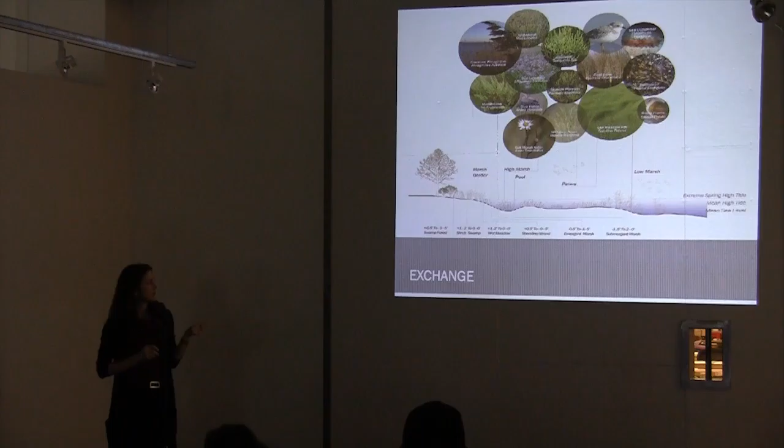But we can also think of exchange in a different way, more ecologically. These edges used to be broader shorelines that had tremendous biodiversity, and they provided a very important function of buffering the upland zones from the extremes of high tides or storm surges.

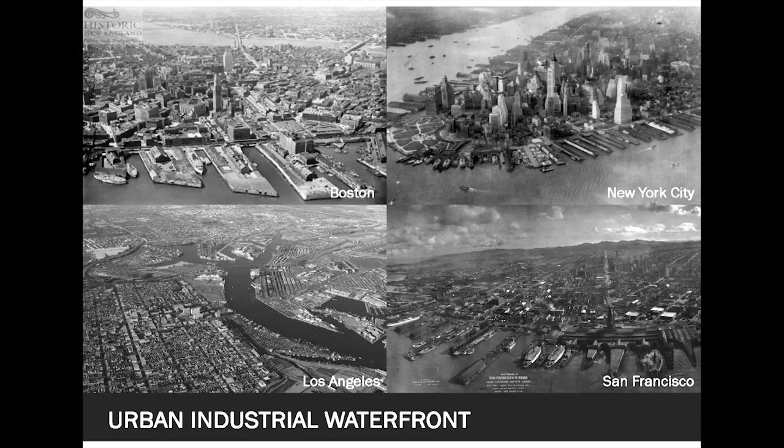But this is really the reality of our urban condition. We have this urban industrial waterfront, and many of these are now post-industrial urban waterfronts, where a lot of this space is becoming vacant. In part that's happening because of the advent of container shipping. No longer do you have people taking individual crates of goods off of boats, but instead you have these large containers which have different requirements.

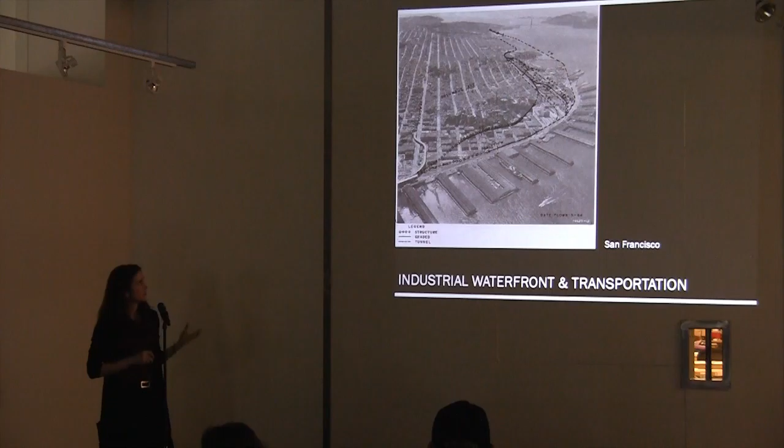They need large areas of storage, and you need the big cranes that are going to take these elements off of the boats. So what that means is that a lot of this waterfront space is actually opened up for new uses, with the industrial waterfront and transportation systems shifting.

We need to go back to that level of thinking. His work is generally cast in relationship to the picturesque, but if we think about its productive capacity, I think we can get beyond that and create new modern structures that have greater efficiency for our cities.

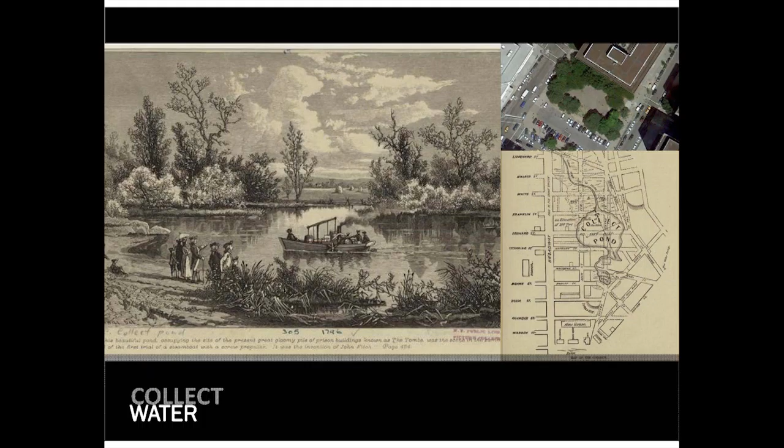We can't forget that we have this whole system of natural water bodies that exist in many cases below the urban infrastructure. This is the Collect Pond in Lower Manhattan. It's currently underneath a parking lot, and the Parks Department is actually in the process of turning it into a new park.

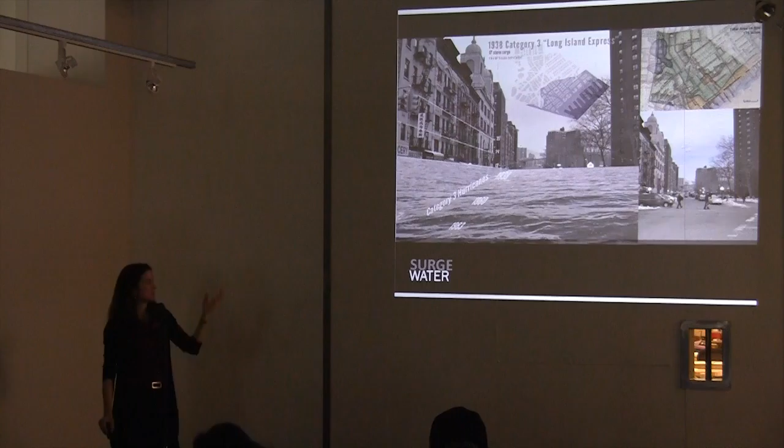A lot of these areas, if we don't actually think about how we're managing the water, we can be hit with large impacts. This is the water level from the 1938 hurricane that hit the whole East Coast. You can see on the upper right, that's the Collect Pond in blue. There is this whole water system that existed historically that has been sublimated to all of this parking. If we don't think about how this water can come in and out, we're going to end up with a fairly disastrous situation. Even without global warming or climate change projections, it's been almost 100 years, and this is a 100-year storm.

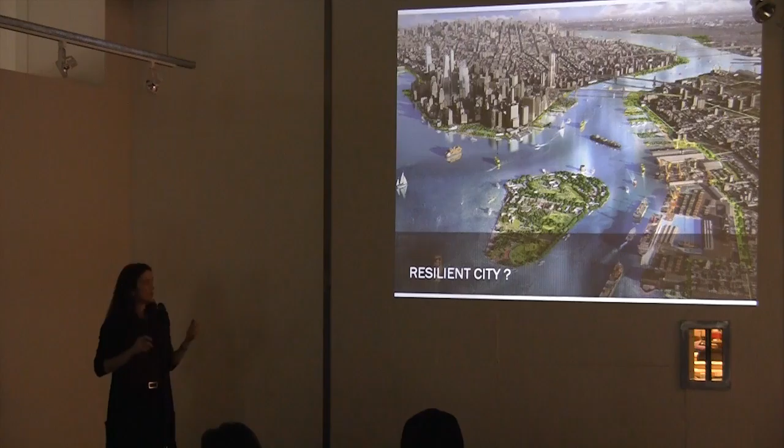This is an image that my office created as part of a task force for the City of New York, looking at how to make our waterfronts more resilient. I'm very happy to say the City of New York has been doing a lot to add these ecological layers, but also to think about how we can maintain our industrial waterfront in certain areas, establish special maritime industrial districts, maintain our tugboat traffic, and enhance ferry traffic. We don't want a uniform green edge where everything is green. We want a coexistence of all these different systems.

So I'm going to talk specifically about a few sites in New York City, as well as one project that we did as a competition up in Montreal.

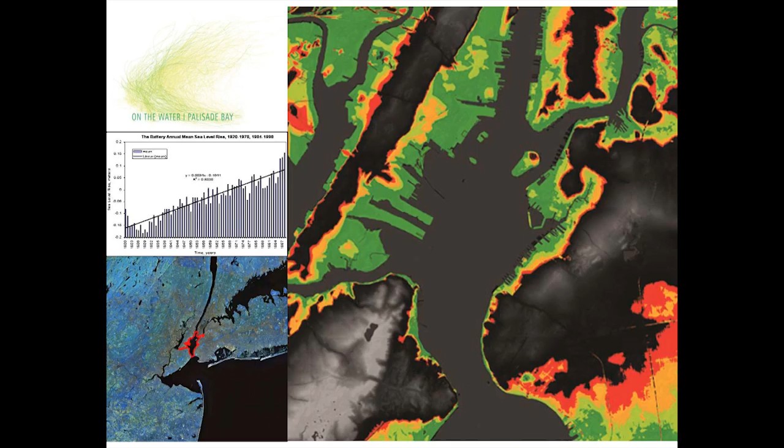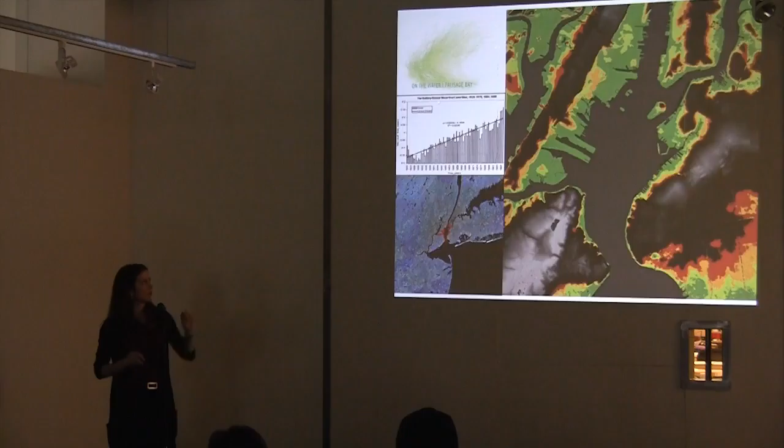Scientists project there'll be a 6-foot sea level rise over the next 100 years. The research went to a certain point and was a very smart document, but hadn't looked more specifically at how these impacts would affect more localized conditions. So MoMA, working with Barry Bergdoll, brought in 5 design teams to look at specific sites. Our team, Team 1, was looking at Lower Manhattan.

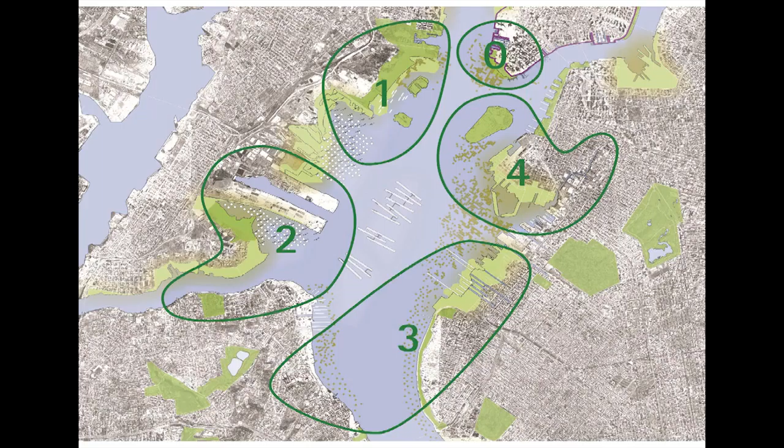SCAPE was looking at the Gowanus area. Mimi Hoang and Eric Bunge from nArchitects were looking at the Verrazano Narrows. Matthew Baird was looking at Staten Island, and LTL at the Liberty Island area. We had these 5 teams working on site out at PS1, with studios set up—it was an intense environment because we were all critiquing each other, but we also had representatives from different public agencies and critics from the different architecture schools. It was a terrific but extremely intense experience.

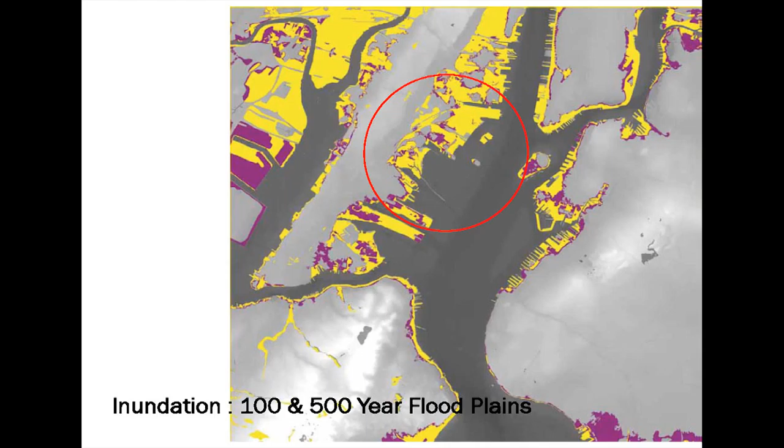So here's our site, and it's interesting to think about the historic tidelands of 1776 and relate these to potential inundation levels. You can see a correlation between the floodplains and these systems that existed in the past. The edge morphology of Lower Manhattan has shifted dramatically over the last few hundred years—this was the natural edge from 1650, a much more graded, softer edge, which was great for the ecology but not so great for shipping.

You can see that the large ship has to stay pretty far back from the shoreline. So in order to facilitate the shipping and exchange, by 1850 you had this new hardened edge with these new bulkheads, and then these slips that were actually cut into the edge of the waterfront.

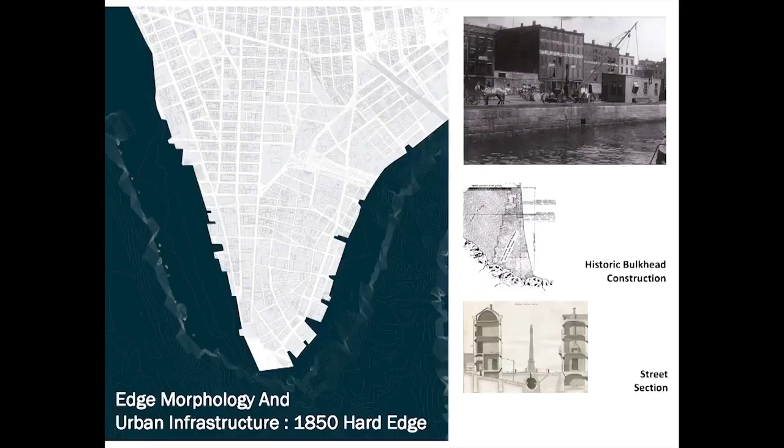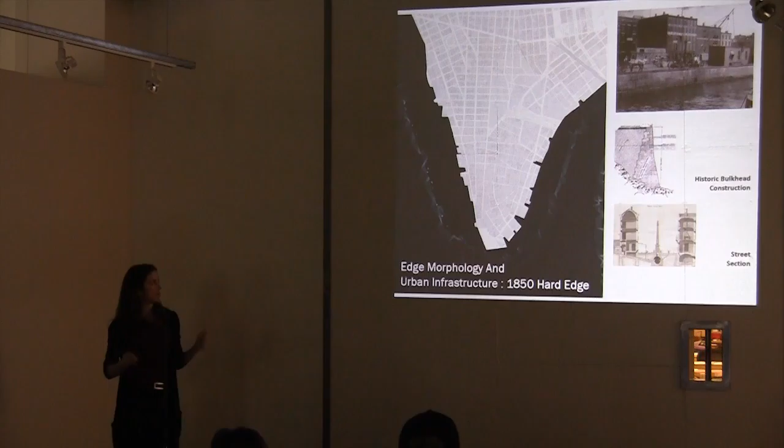Now, Exchange Place actually exists right here, that's where the stock exchange is. The names of the streets and places were actually related to that commercial activity. Then by 1960, you had another morphology, these finger piers sticking out into the water, so you could get larger boats into the harbor.

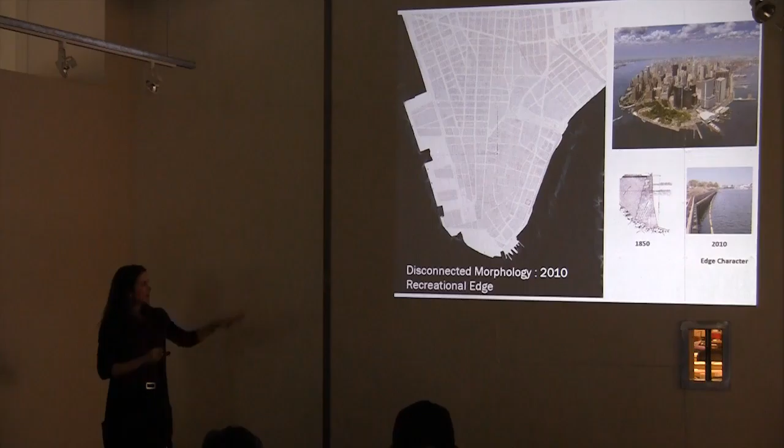But by 2010, we have a different morphology. There's less shipping in the city because of the movement of containerized shipping out, and so we have this recreational edge. The recreational edge is no longer directly connected to the street structure. So while it's wonderful to have all the parks developing along this perimeter, it's also a bit disconnected from the city.

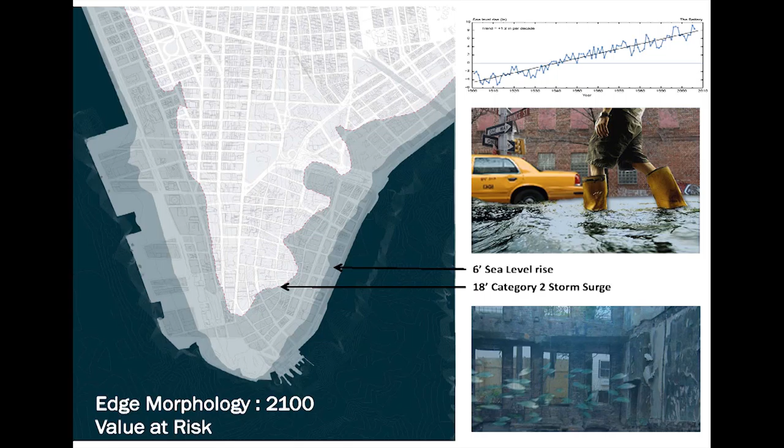So we really want to think about the 2100 edge morphology, and also really consider the value at risk. Our site had some of the most valuable real estate, probably in the world. The location of the stock exchange is down in here, and Goldman Sachs is over here, and we've got all these huge banks. If you had one of these impacts, you'd have a huge economic crisis.

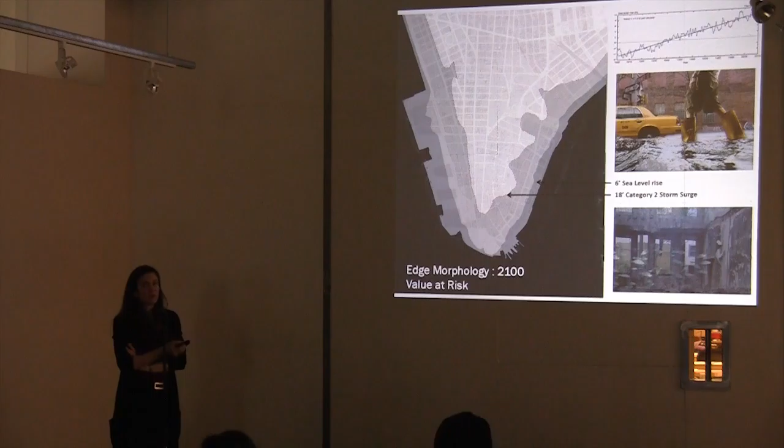So we needed to really show that and point that out, and have city officials pay attention, and also have a lot of these companies pay attention. That was a really great value of the exhibition. When you actually see it in relation to this floor plan, or this site plan, it starts to become a lot more real.

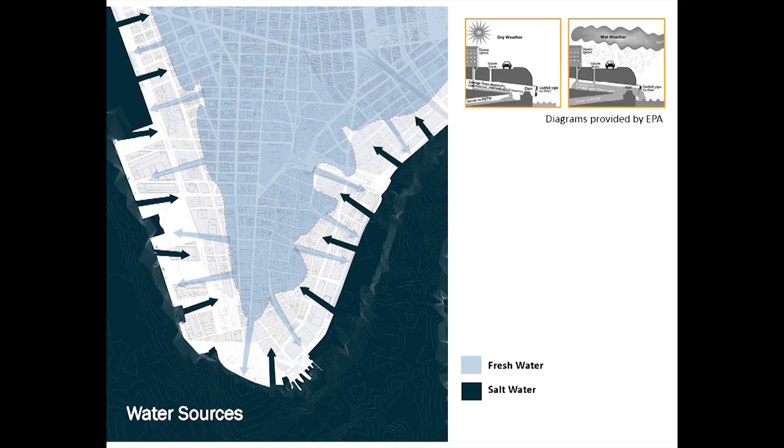But we were also thinking about the fact that New York City also has a combined sewer system. So when we get even a 20th of an inch of rain, our sanitary sewers and our storm sewers combine, and you get these overflows into the harbor. So we wanted to be dealing with the current problem of this fresh water, and then also the potential inundation of salt water.

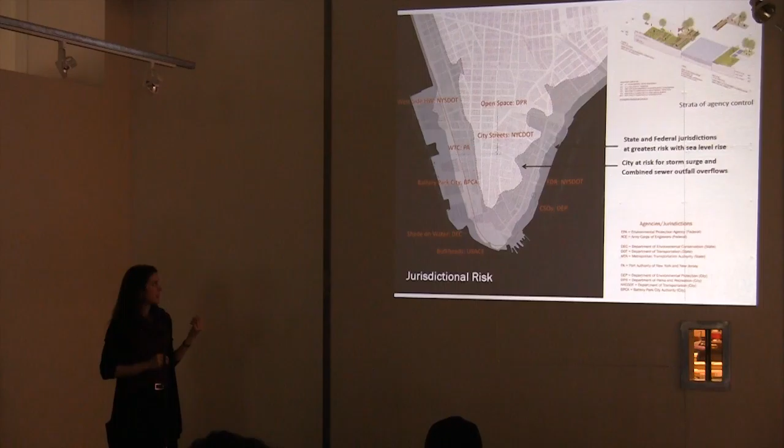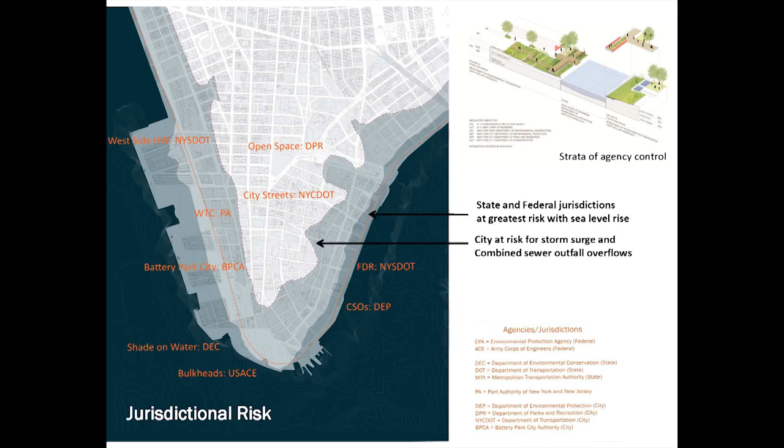Now, it's a very complex site in terms of jurisdictions. We have state, city, and federal officials or entities that all have various jurisdictional levels of control over the area.

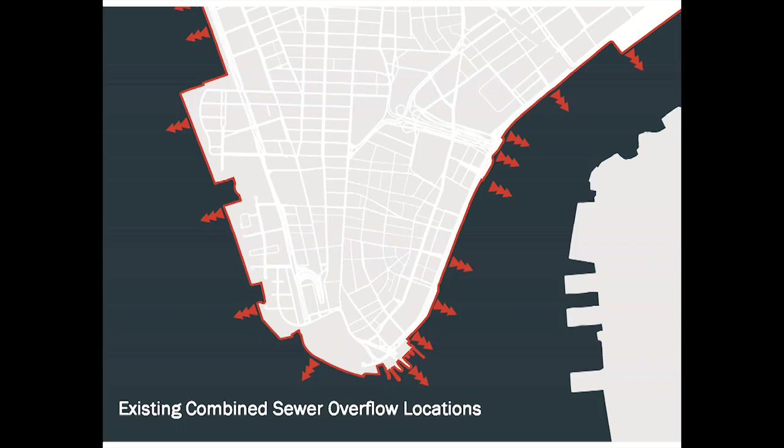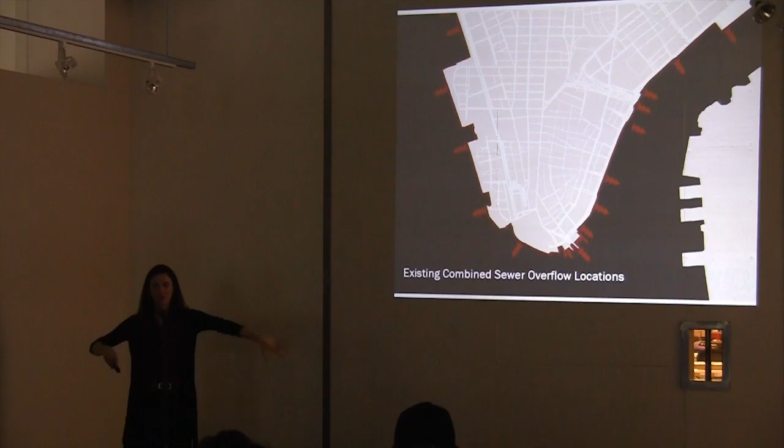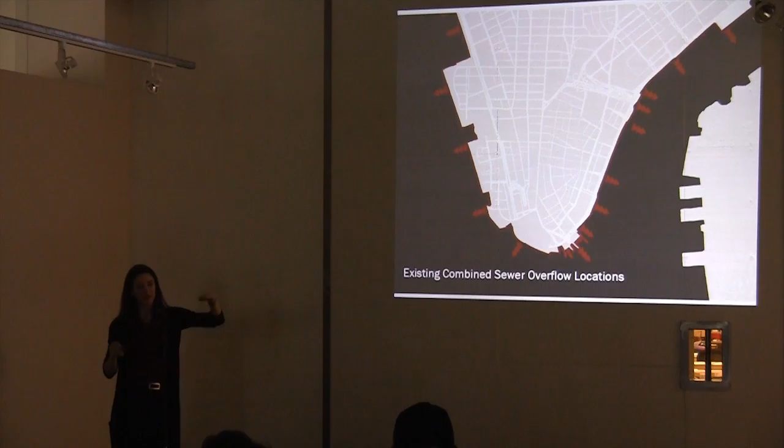You can see these are the locations of all those outflows. Ours are actually a little bit more sneaky because they're not quite as apparent, since they happen right at the bulkhead. Sometimes they're actually just even, almost at the water line. So you can also think about how you may have issues with, if the water level rises and your CSO is below it, then what do you do?

So we wanted to think about this water in, water out system, and really create this new urban ground. This was sort of our area of operation, the area in the lighter grays was where we were working. So we started by thinking about this whole upland system of streets.

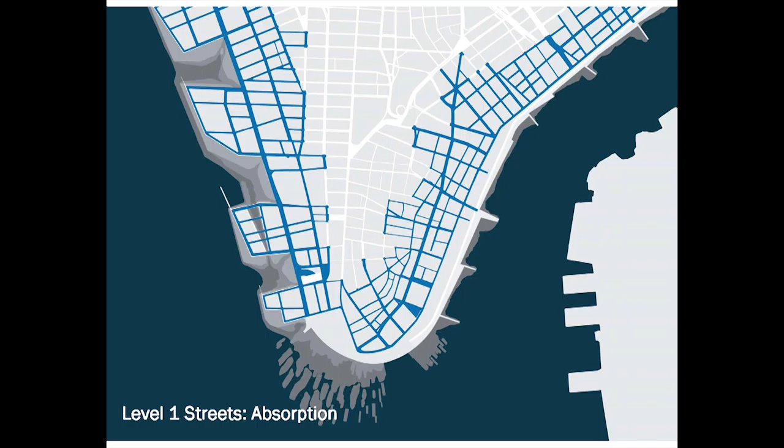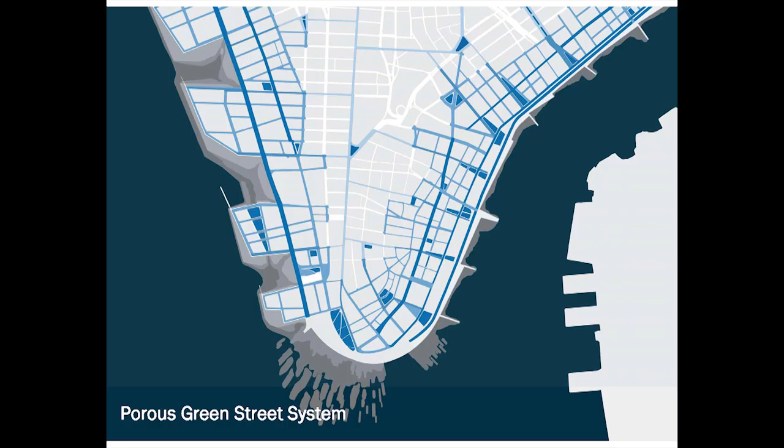We have Level 1 streets, which are about absorption. These will work all the time; it's a new street system that helps to soak up all the surface water runoff. We have Level 2 streets, which distribute and collect this fresh water. And then Level 3 streets, which are really about protection, so when a storm surge comes in, they get the water out really quickly. And that creates a whole porous green street system, and here you can see the thought on how that might work.

I put all of the infrastructure that's currently in the street in waterproof vaults under the sidewalk. The idea is that there would be hatches that you could use for access. So if you ever had a fiber optic line that became obsolete, or a gas line that was broken, or any kind of pipe going through the system that wasn't working, you could get into it easily. You wouldn't have to rip up the street or rip up the sidewalk; there'd be these access points.

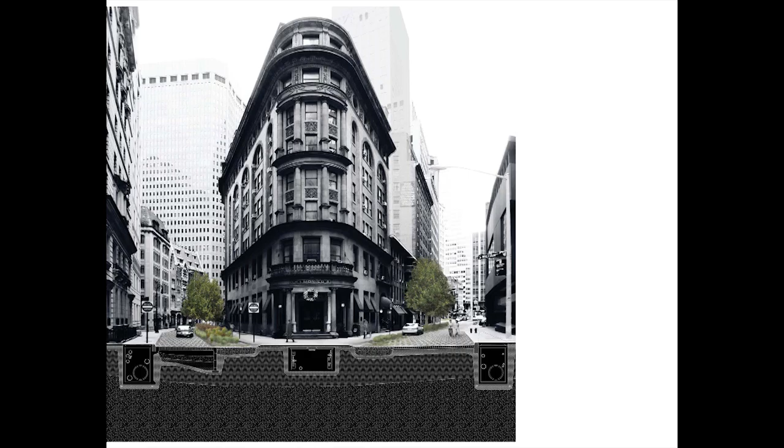So here's the idea of how that would operate. We also had these porous streets. Basically, we're taking over the whole street bed and making it absorptive.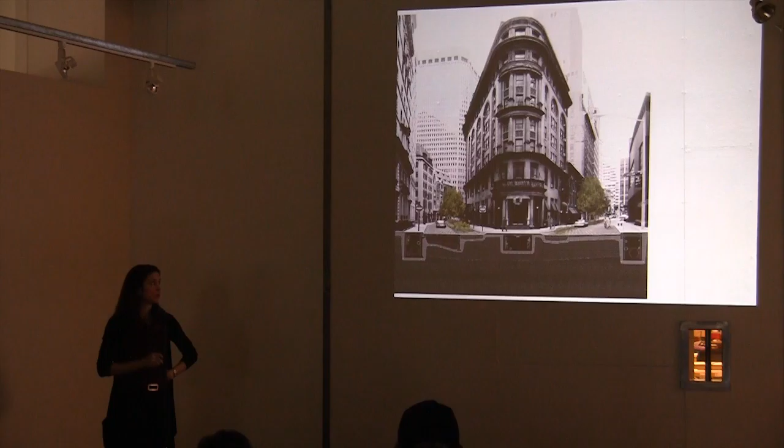And we also eliminated a lot of the parking that's currently available along the streets, putting it into buildings, or just saying Lower Manhattan is really well served by public transportation, use it. So here is a system of one of the protection streets with this conduit that would take the water out quickly, and an idea about new transportation systems that might happen along the perimeter.

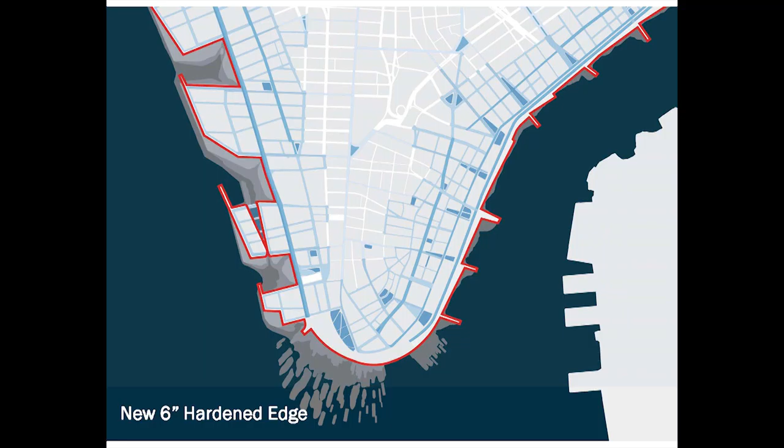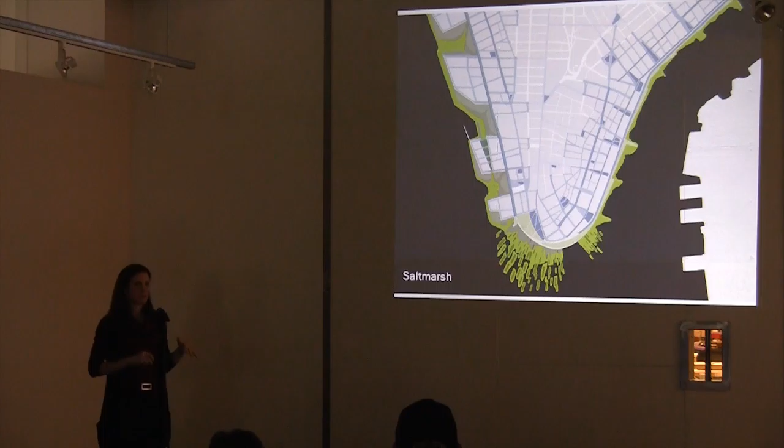So we also were looking at the edge. We created this new six-inch hardened edge, new waterfront park space, freshwater wetlands, and then salt marshes at the perimeter. It's really a combined system that would provide for many different kinds of landscape needs. Here you can see the whole system together and our vision for a new way of thinking about the urban environment that is much more layered and varied. So I'm going to describe them in a little bit more detail.

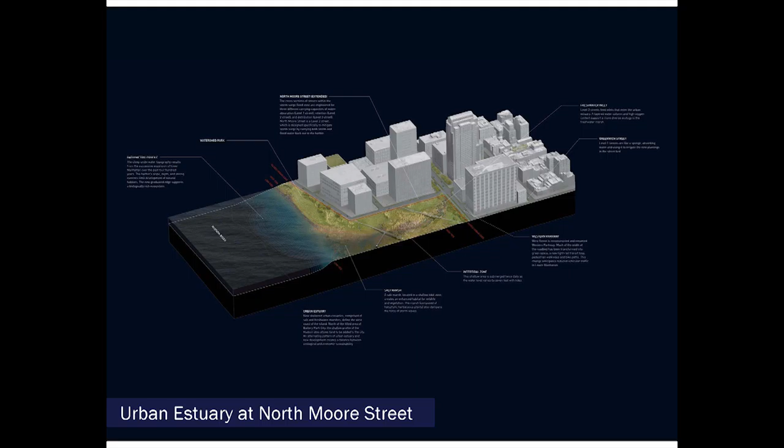We have this urban estuary at North Moore Street, and here you can see we had the upland spaces and then a transition from freshwater to saltwater marshes. We have walkways that would go out over these marshes, and the section of that.

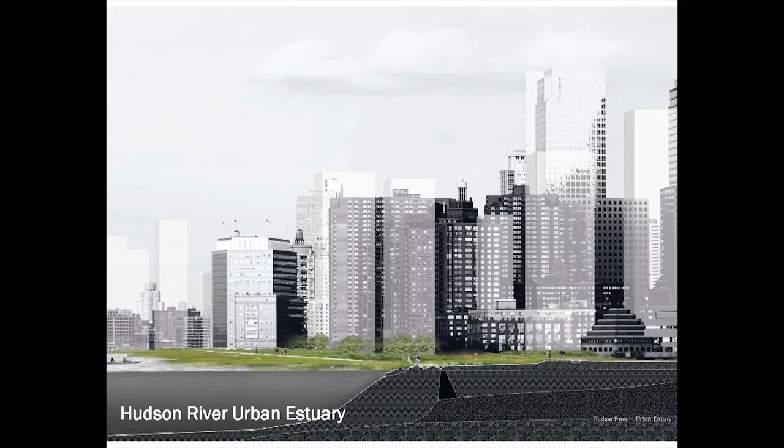Moving down into other parts of Battery Park City, I want to point out that we actually had to cut into the island to provide these new wetland spaces. We're not just giving away land to the ecology. We're imagining this as a new kind of urban waterfront edge typology, where this could continue all the way up the edge of the Hudson River in Manhattan. There'd be development space created and ecological space created. So it's not just a purely ecological approach.

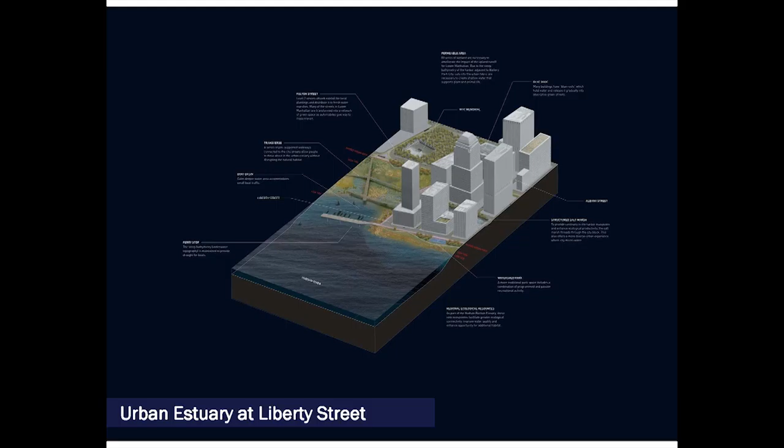Here we have the urban estuary at Liberty Street with new marina space, again walkways that go out over the wetlands. In this case, we've actually taken the waterway through the city. And you can see also a suggestion of new green roofs.

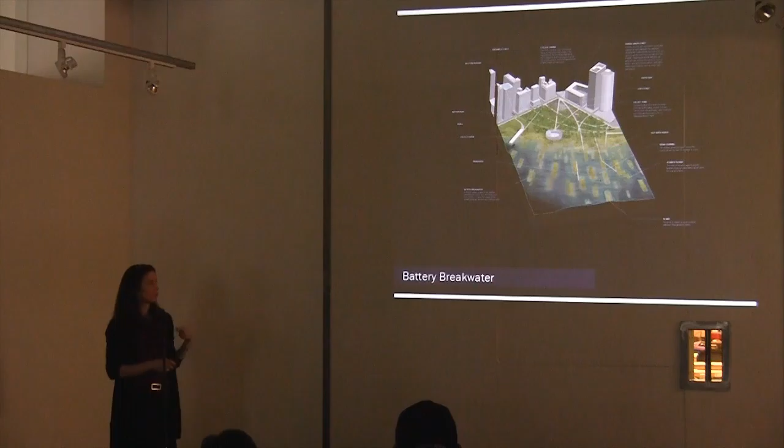Here we have what we call the battery breakwater. We put soil, and silt actually, dredge material into these geotextile sacks, and we'd sink them in the shallows at the battery and have that provide a breakwater for large wave action. If you have a certain period of a wave, if you can actually break that before it gets to the shore, you'll help to protect the upland resources.

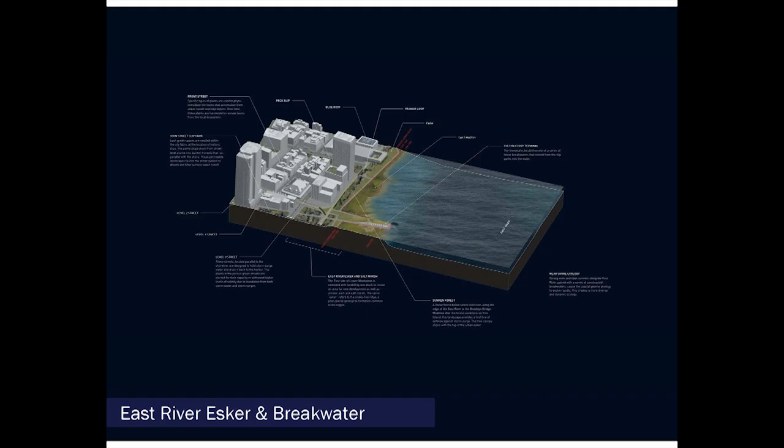And then along the East River, we have what we call the East River esker and breakwater. An esker, as all you landscape architects know, is a snake-like mound formation that was formed when the glaciers retreated. We're going to use that idea as a kind of large berm that can help to protect the East River waterfront. Outbound of that, we have this estuary space, more of this wetland edge. Within the old historic slip structures, we have these landscapes that can actually withstand periodic inundation from salt water. So here I'm showing spartina and other species that can handle the salt or brackish water.

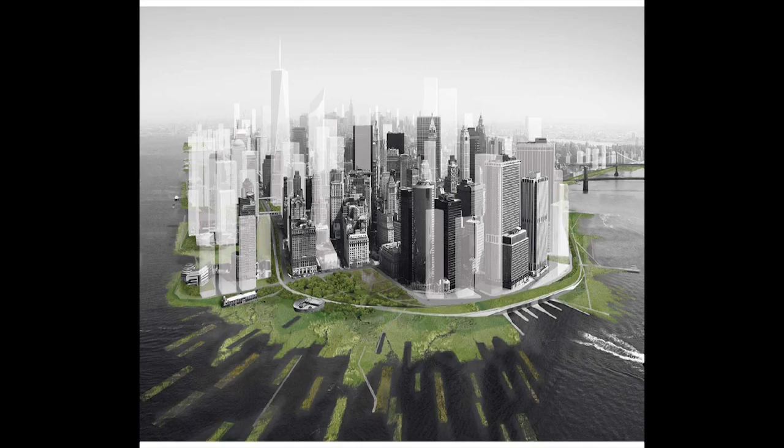This is our vision for a new urban experience for New York City, a space that's both resilient and economically productive.

Now I want to talk about a project we called Vision BQ Green. When I started my practice, I applied for a grant from the New York State Council on the Arts and developed some of the material that you'll see in this project.

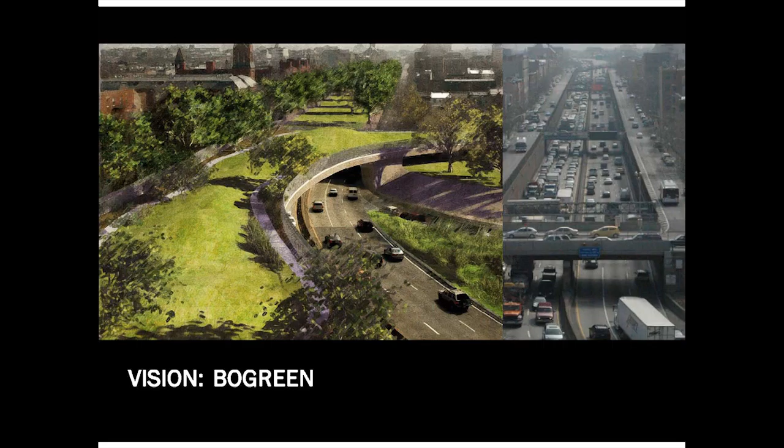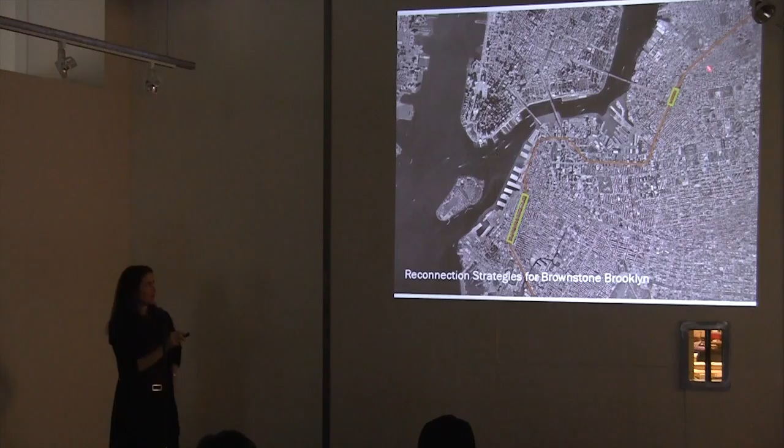We looked at reconnection strategies for Brownstone Brooklyn. The initial research focused on this area in Carroll Gardens. We were then subsequently hired by a not-for-profit to look at this area in Williamsburg, and so I'm going to show you a couple of those projects.

So again, we have the landscape by Moses. He did actually build this incredible series of parkways and parks throughout the city, but the reality was not always so green.

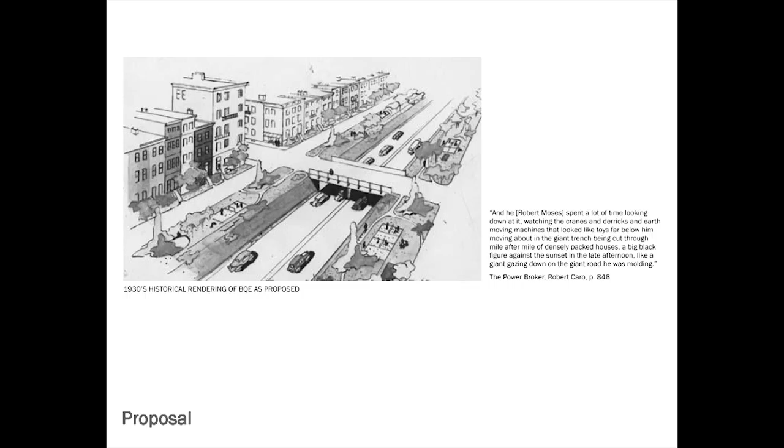Robert Moses spent a lot of time looking down at it, watching the cranes and derricks and earth-moving machines that looked like toys far below him, moving about in the giant trench being cut through mile after mile of densely packed houses, a big black figure against the sunset in the late afternoon, like a giant gazing down on the giant road he was molding. This is from The Power Broker.

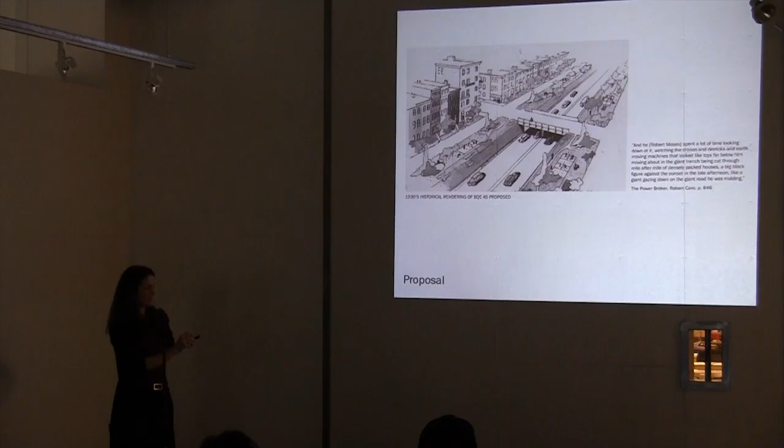And you can see Moses had this hotel room at the Bossert Hotel, which actually looked down on this site, going through this neighborhood.

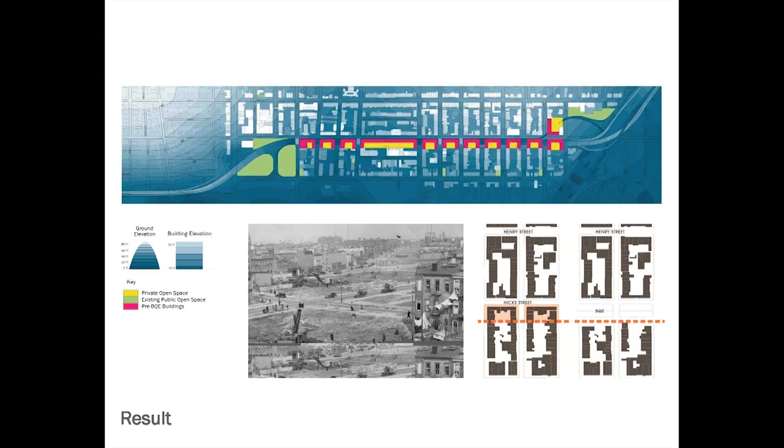40 years later, 50 years later, there's still animosity between the neighborhoods, between Carroll Gardens and Cobble Hill and Brooklyn Heights. Brooklyn Heights actually fought having the trench go through the neighborhood, and you can see where it curves. So Brooklyn Heights now has the Brooklyn Heights Promenade, this lovely triple cantilever of traffic with a walkway above, with the best views of New York City anywhere. And Carroll Gardens and Cobble Hill have the trench. So there are these ongoing issues with that.

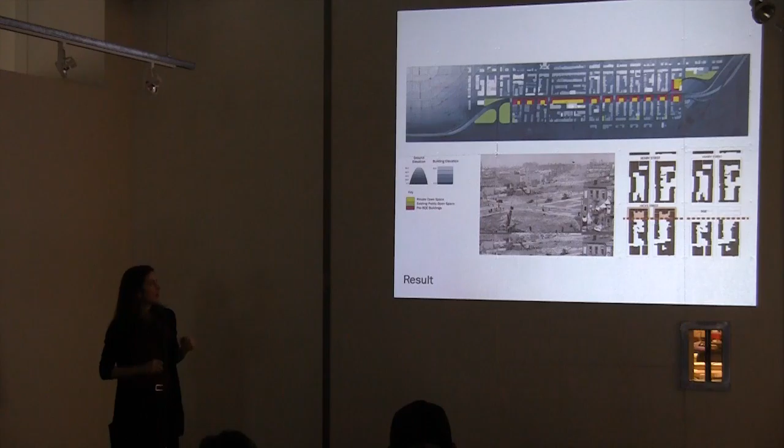So here you can see how this really affected the neighborhood, and there are dramatically different real estate values between the upland area and the waterside area, with the houses on one side being worth millions and millions of dollars, and the houses on the other really not.

We also have territorial boundaries that exist in relation to the BQE. In Williamsburg, we're working with primarily the Hispanic community, and on one side we have the Dominican gangs, and on the other side we have the Puerto Rican gangs, and the territorial boundaries are actually defined by the trench.

There are also some social issues that we were looking at, trying to find correlations between poverty, physical activity, obesity, and asthma. The asthma map is actually pretty interesting. We also looked at the physical impacts of the site, its physical realities, and whether some of these park spaces created in these extra zones are actually amenities or really an attractive nuisance. Are you bringing kids into an area where they're going to be breathing all these fumes?

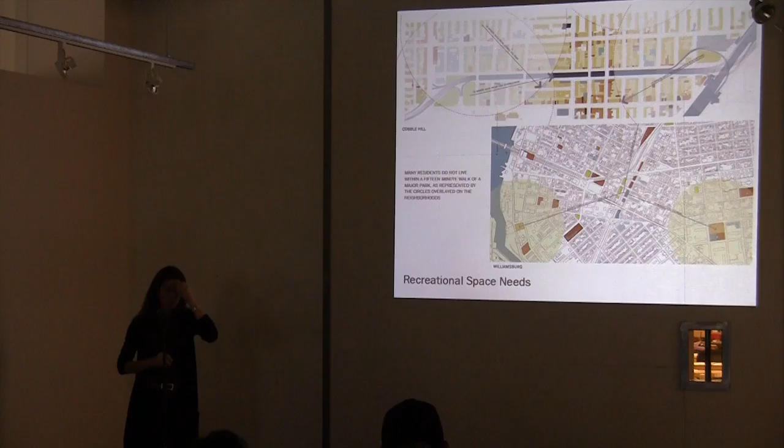So we looked at, or used, PlaNYC. The Bloomberg administration has a really wonderful document called PlaNYC where they're trying to look at how to make the city more sustainable in the future. One of the guidelines is that everyone should have a park space within a 10-minute walk of their house. So this map actually shows the relationship of park space to our site.

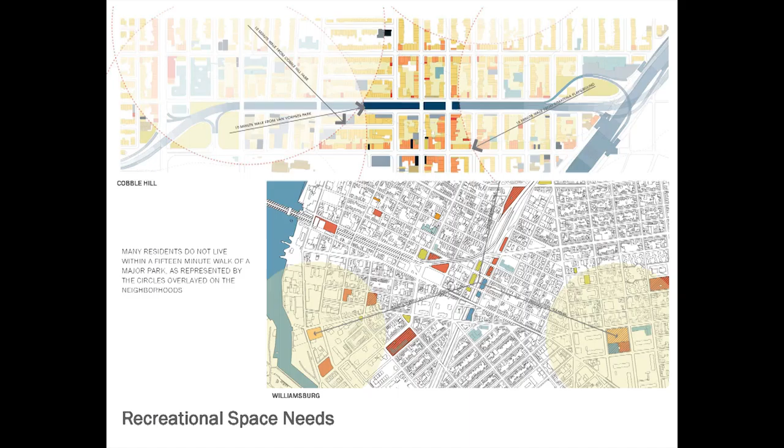And you can see that in the Carroll Gardens area, there's a big hole. In our Williamsburg site, we don't actually have the same kind of relationship, but what we're lacking here is recreational space for kids who are, say, 8 to 18. We need more of that kind of active recreation space.

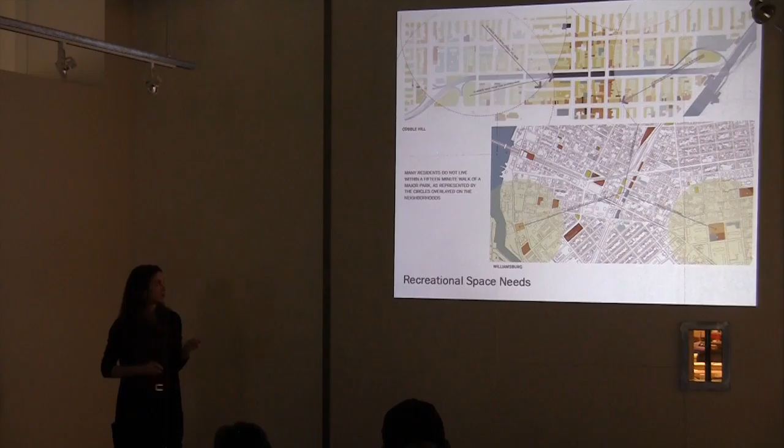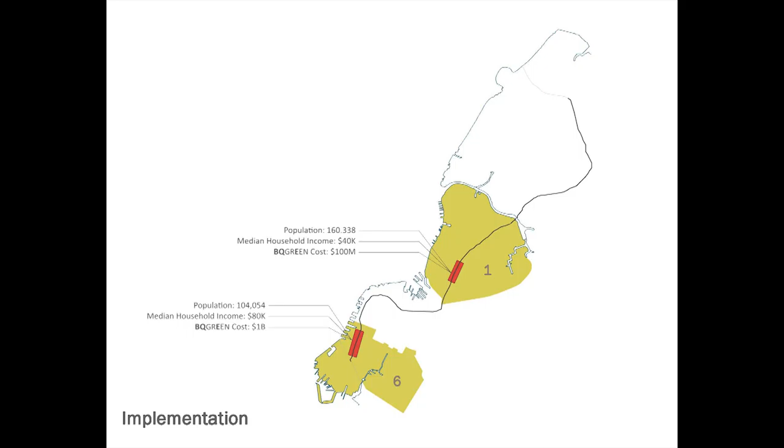So we have a population in our Williamsburg site of about 160,000, and a population in Carroll Gardens of 100,000, but our median income is much higher in the Carroll Gardens site.

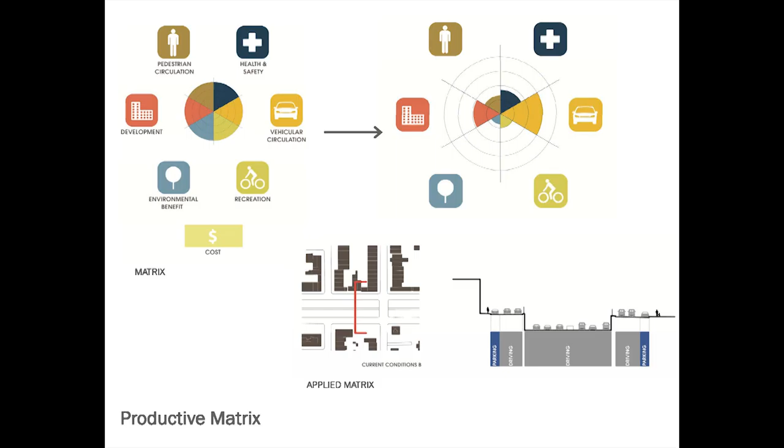So we tried to think about how we might rethink this area, or rethink this structure more generically. We looked at pedestrian circulation, health and safety, vehicular circulation, recreation, environmental benefit, and development, and looked at how those issues relate to the current condition. You can see here that right now, the car wins. So we wanted to rebalance that equation.

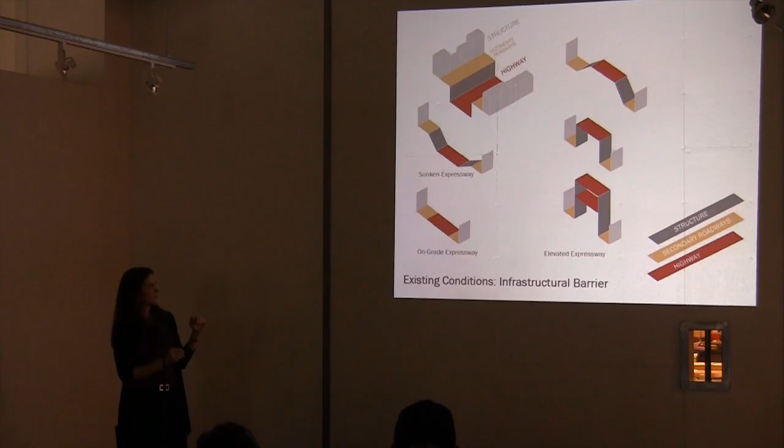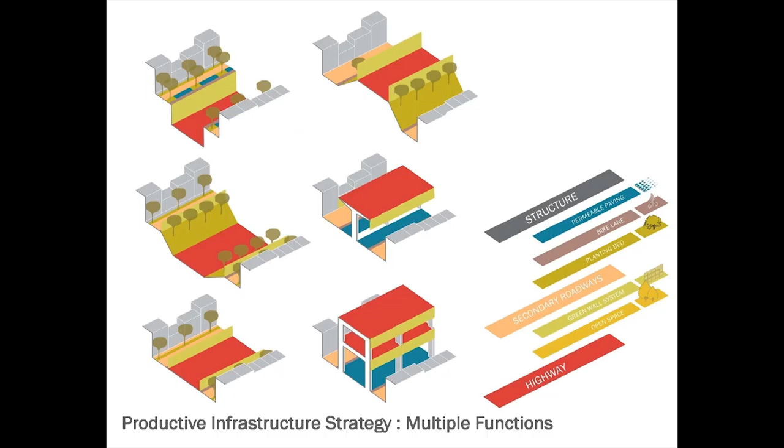We looked at the existing conditions, the infrastructural barriers, and really analyzed what the different typologies were, and then how we might make a more productive infrastructure strategy with multiple functions by layering on more elements.

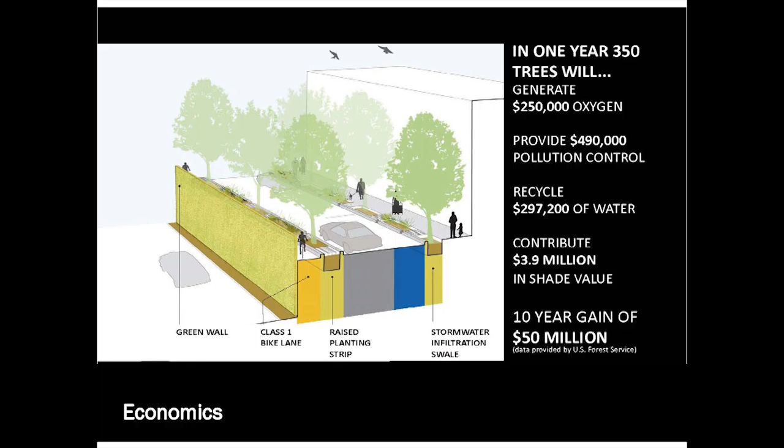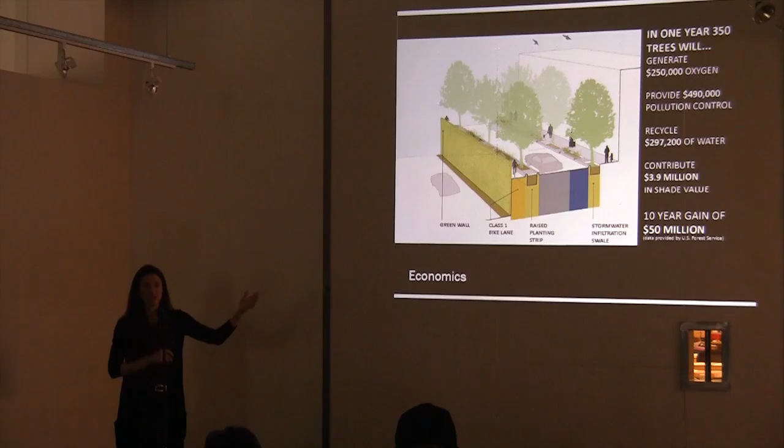So what we did was we actually used this diagram and gave it to our congresswoman, who then said to the local DOT, 'We need to do more research on this project.' The congresswoman said, 'I can get you a grant for a couple hundred thousand dollars to do more work, but you guys need to provide the local match of $60,000.' Basically, they saw this gain really benefiting mostly the city, so they thought this actually makes a lot of sense, and they funded the project, or at least more study. They didn't fund the construction of it. It's probably a $1 billion project.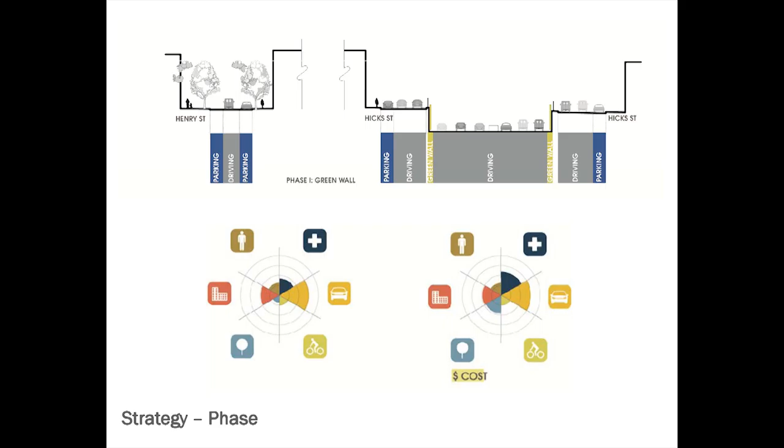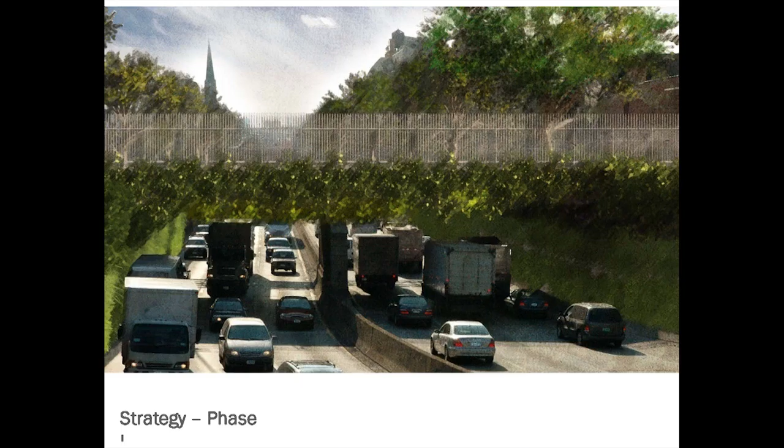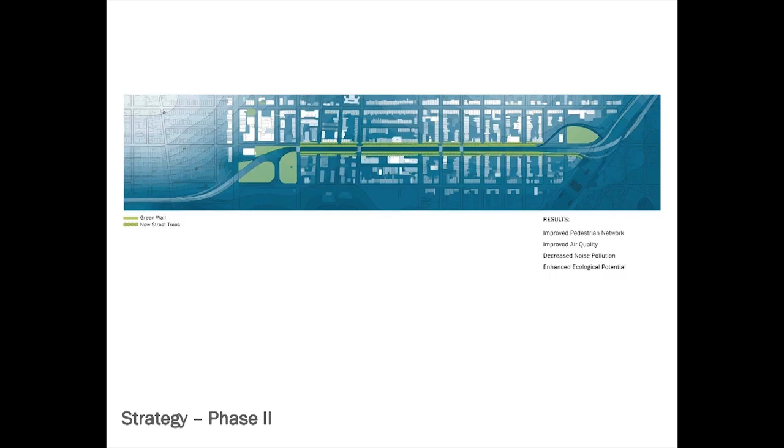So this is the site in Cobble Hill, and you can see how even adding green walls starts to fill out some of the circle. Here's the site—Susan, can you plug in the tower program? So here's strategy phase 1, and here's phase 2, where we added green walls, street trees, and a bike lane, and you can see that the circle is starting to expand. And then here, phase 2, and how that would look.

The phasing of this was actually also really important, because there was a lot of fear about capping the whole thing right at once, and dismissal of the idea of capping it because it was this enormous project. But showing that we could actually do this kind of intervention in the short term was a really valuable step.

This was dismissed early on, or in prior generations, because no one actually went out and measured the streets, they just relied on the survey. So we went out and actually took a tape measure and measured the streets and discovered that we had a couple more feet.

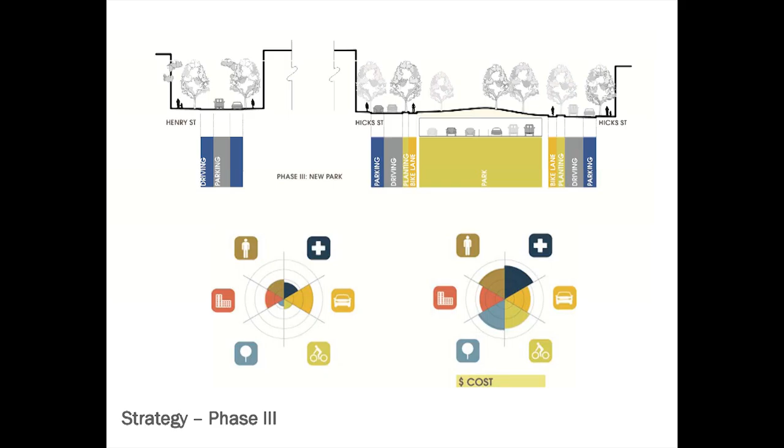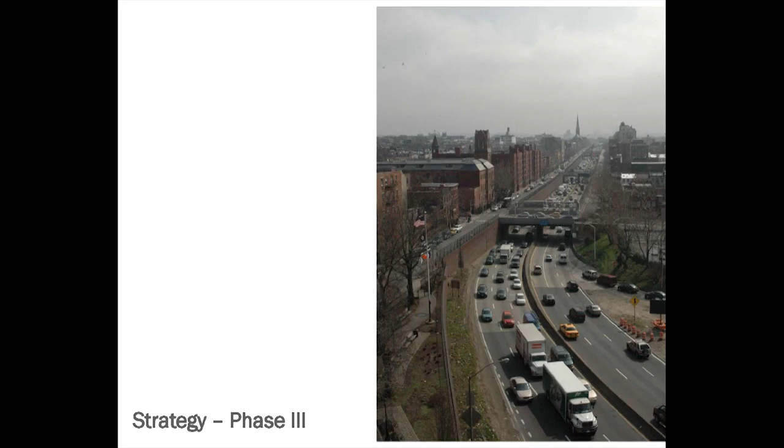So we squeezed the street trees in. And then here in phase 3, this would be a capping strategy, and you can see that it really has a huge benefit in all of the categories. So here's the phase 3 before, this is what it looks like now, and then our future vision.

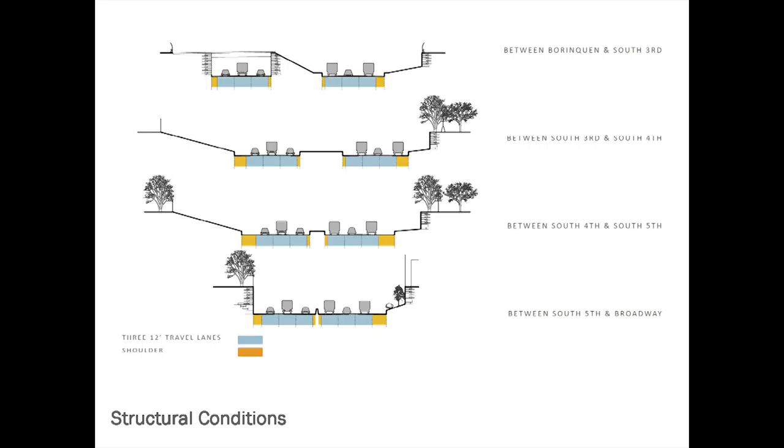In Williamsburg, because of the work that we had done on that other project through this grant, Councilwoman Reyna, our city council, hired us to do this project, looking at a few blocks of the BQE in Williamsburg. Here we're looking at an area between Borinquen and Broadway, and we really assessed the structural conditions of the site in these different areas to determine the feasibility.

It was interesting, we ended up only choosing to deck 3 blocks because in this area between South 5th and Broadway, we couldn't get in an intermediate structure. The reason that was important is that we had to bring the highway up to federal standards, and that would mean we'd need 16 feet of clearance underneath the bridges.

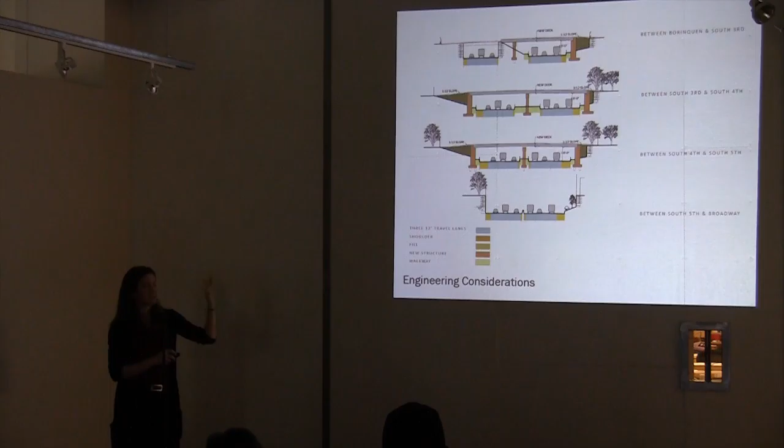So in order to get the 16 feet of clearance, we need to keep this deck pretty thin. And in order to keep that deck pretty thin, you need to have an intermediate structure. And that also affected what we chose to put on the top of the deck, which I'll explain a bit in a few minutes.

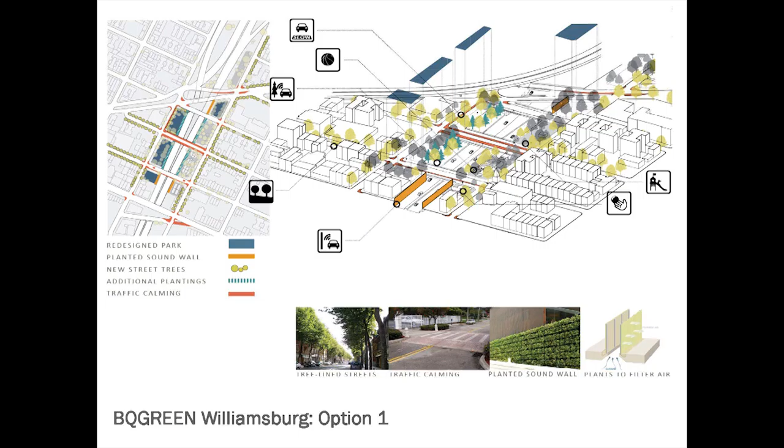So we started by thinking about adding traffic calming to the area, but then proposed that we could add some larger open spaces. We added a baseball field and a soccer field.

And the great thing about proposing these recreational structures is that we could use field turf, and that doesn't have a very deep profile. We couldn't really get trees and larger shrubs on the center of the site over the deck.

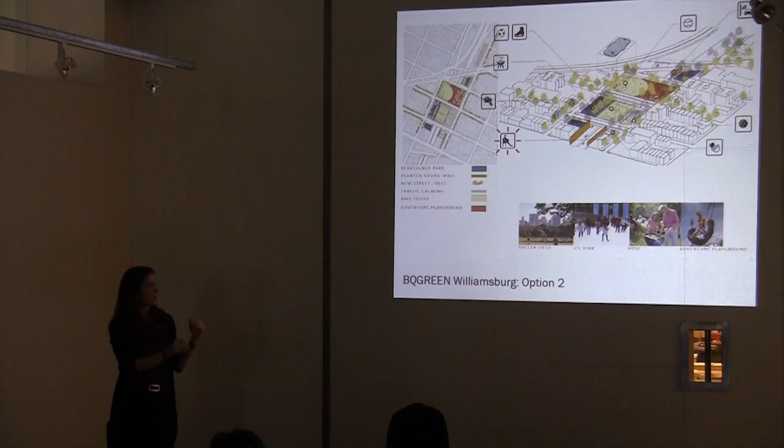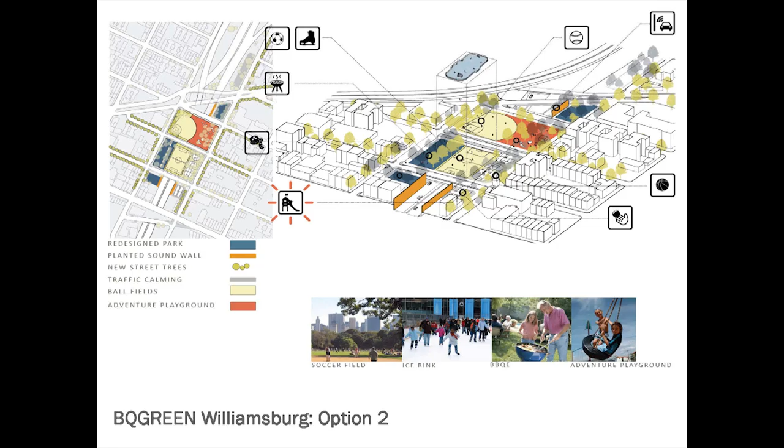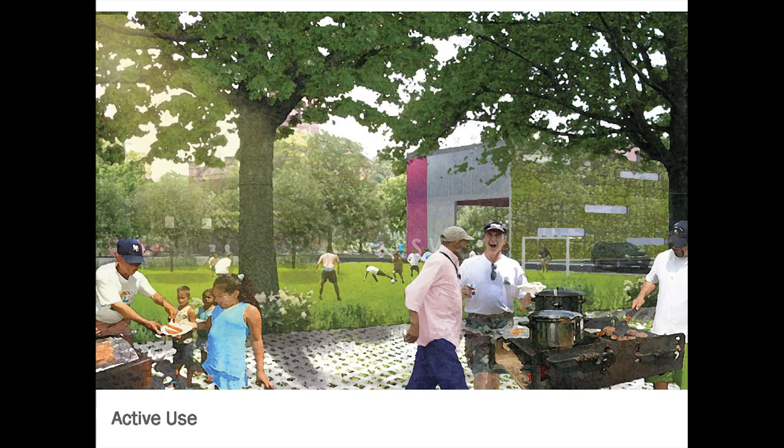So what we did was we proposed to accentuate the edges, or build a richer ecology along the edges, and have the middle part be more of this active recreation space. Here you can see this neighborhood limitation becoming a new recreational opportunity, this passive use becoming an active use, and this minimally used park becoming really a place for the community.

The other really important aspect of this, in terms of how I run my practice, is I really try to figure out how to make these things happen. And I think that's one of the reasons Raina brought us in. She loved our design vision, but she also knew that we knew how to negotiate the public process, and also a larger funding idea.

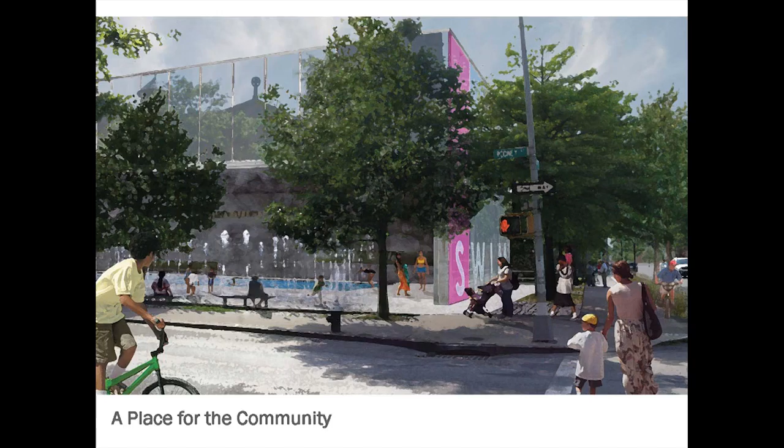With this project, these bridges that go over the trench are about 50 years old. The lifespan of the bridges is about 50 years, so the city is going to have to replace them. It's going to cost about $20 million to replace them.

We know that there are larger funding streams from the federal government through some new partnerships between HUD and the DOT. We've been watching Shaun Donovan's initiatives, and he's a friend, and I just thought, you know what, we can actually make this happen in this site and benefit the 160,000 poor Hispanic people who live in this area through this partnership between the federal government and the city. So that's our idea for how we might make this happen in the long term.

As a landscape architect, I really think long term. We plant a garden, or we design a park, and when we first put it in, it's in this young adolescent stage, and it's not going to really achieve its true beauty or grandeur for 20, 30 years. It's kind of the same thing with a lot of these public projects. You know you're getting in it for the long haul. You're seeding change that will make the city better for our kids.